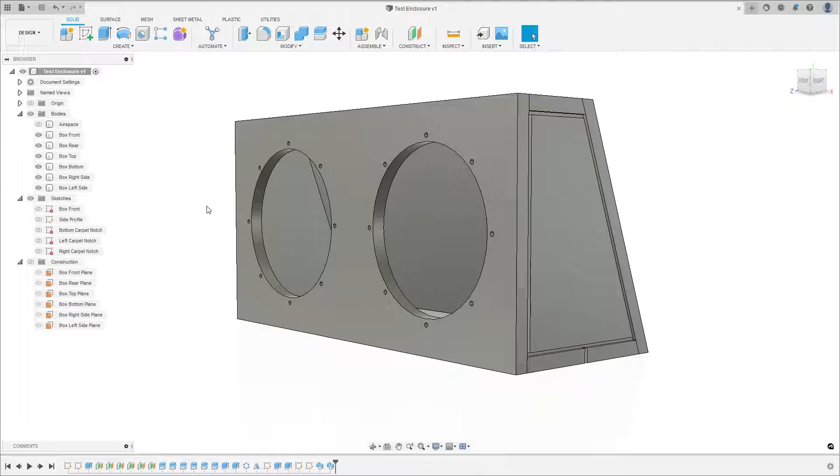We're also going to add some details to the sides and to the bottom of the enclosure that's going to aid in upholstering it. And also the nice part about this design method is the ease in which altering dimensions can be done after the model's created, whether that be for fitment or aesthetics, or to use this model for different vehicles. So we're going to go ahead and create a new file here, new design.

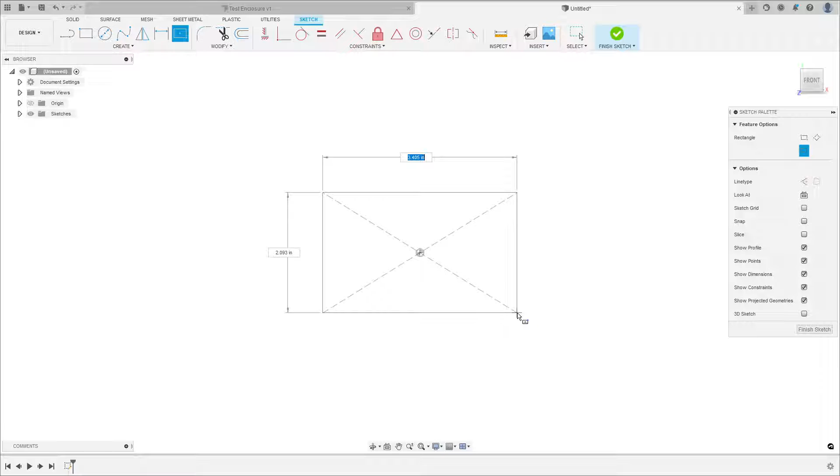We're going to create a sketch on the front plane. I'm going to pick the center rectangle tool. I'm going to snap to the origin. And our dimensions here for this enclosure should be 26 inches wide by 18 inches tall. Zoom out to fit this in. We're going to be putting 2 speakers in this enclosure. We want them to be centered on each respective half.

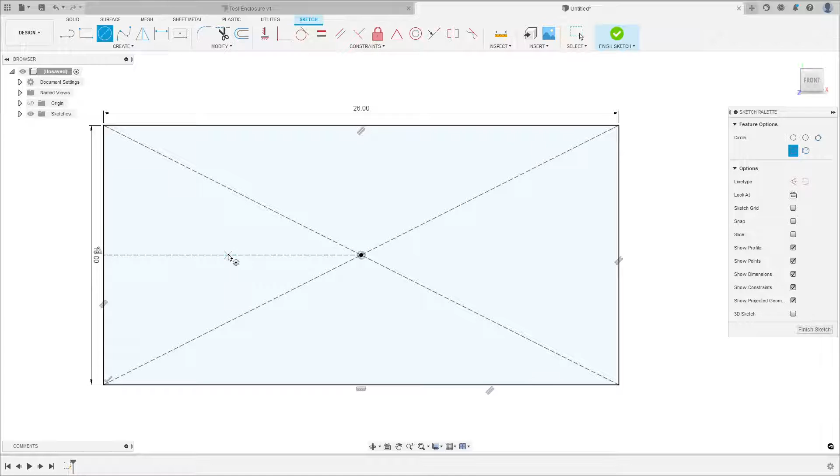We're going to create a construction line from the origin to the midpoint of this left side of the front of the box. Now we're going to select our center diameter circle tool. We're going to turn off construction lines. We're going to come over here to this construction line. We're going to snap to the midpoint. We're going to draw out our circle. The hole for the speaker needs to be 9.0625 inches, and then we'll press enter.

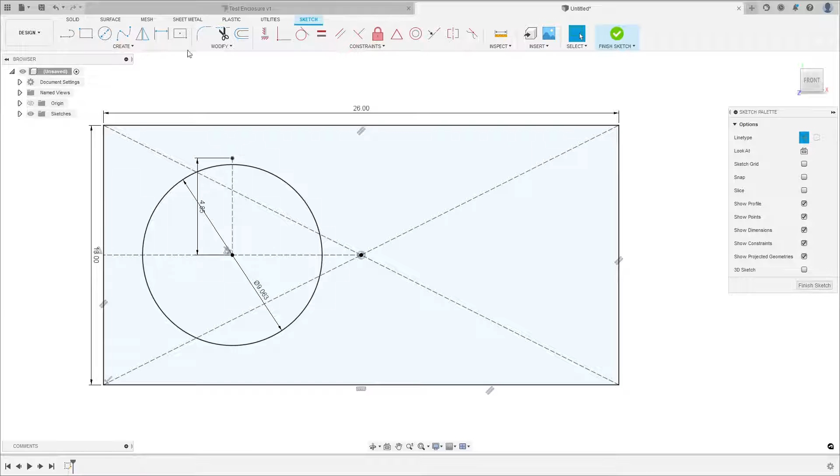And then we're going to go ahead and create a construction line. We're going to snap to the middle of the hole for the speaker, and we're going to come straight up for the mounting hole diameter, which is 9.7 inches divided by 2 because we're dealing with the radius. Now we're going to put in a hole for a T-nut that we're going to use to screw the speakers in. So we're going to select center diameter circle, snap to the end point of this radius line that we just drew. Those holes need to be 1/4 inch in diameter. We're going to type in 0.250, press enter.

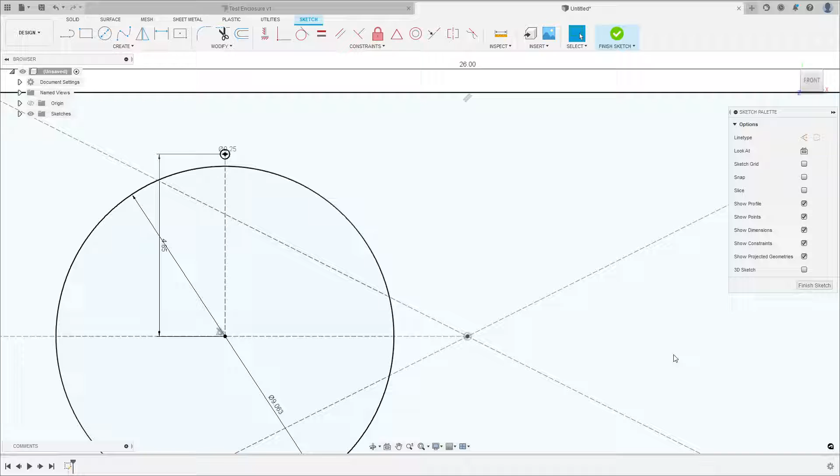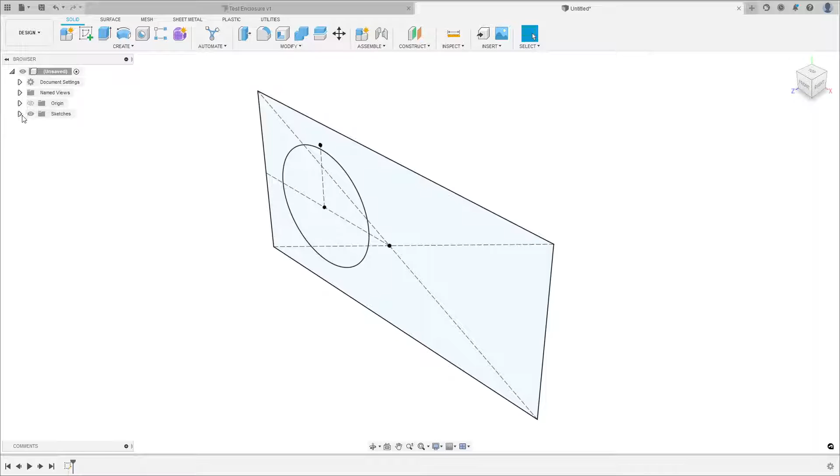So that is the front of the box, sans the hole for the other speaker and the screw holes that go all the way around each speaker. We're going to show you how to do those pretty quickly in a future step. So we're going to hit finish sketch. Zoom out here, drop down my sketch list. I'm going to name this one box front.

I'm going to create a new sketch. I'm going to use the right side plane. Let's rotate around here, select that plane. Now I'm going to hit P for project. I'm going to project this side of the front. Projection link is on. That way if we make any changes to this front, this projected line will change with it. We're going to hit OK, and I'm going to move the camera back to the right side here.

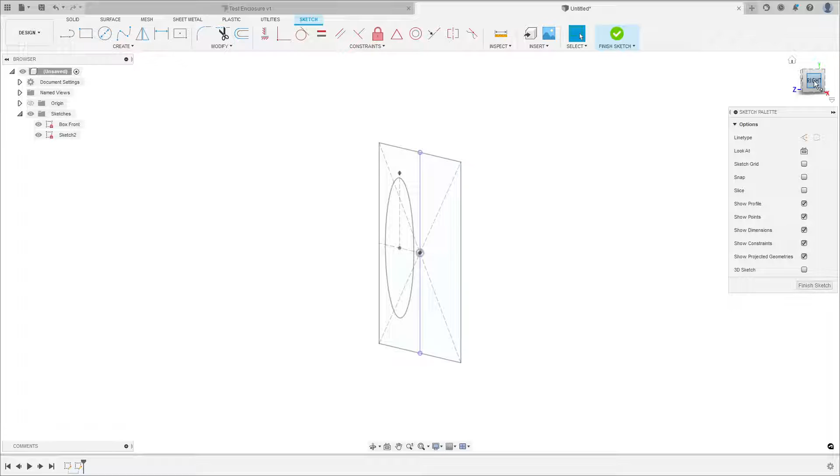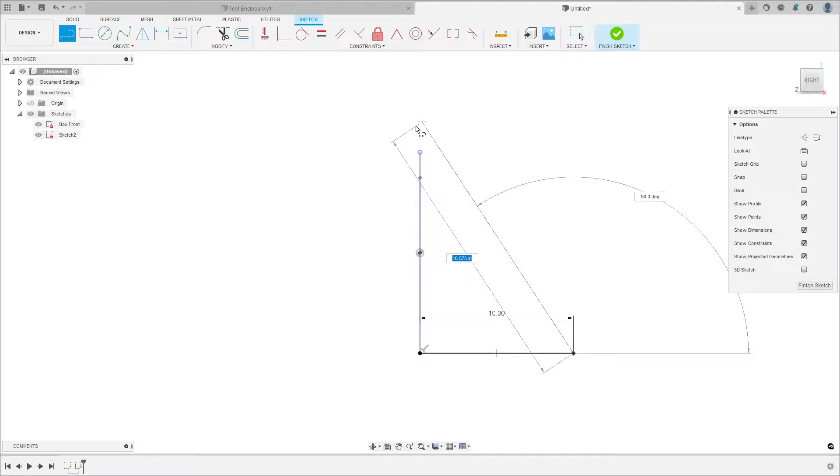Now the bottom of the box needs to be 10 inches deep. Type in 10, press enter, and the back of the box has to be at a 20-degree angle. So we're just going to sketch a line up here past the top of the box over here. And we're going to tab over to the angle, and we're going to type in 110 degrees. That'll give us our 20 off of 90. Hit enter.

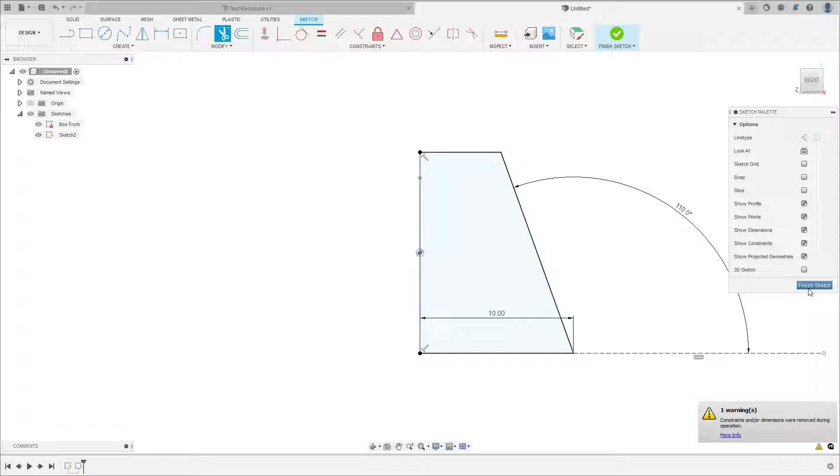Select the line tool again. We're going to snap to this top point and just drag this straight over till it intersects with the back. Now we're going to use our trim tool, cut off this little extra edge. We're going to finish the sketch, and we're going to rename it side profile. Press enter.

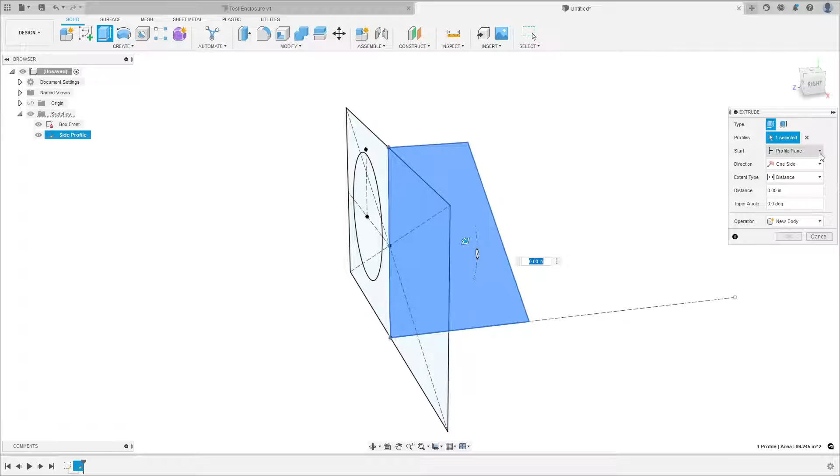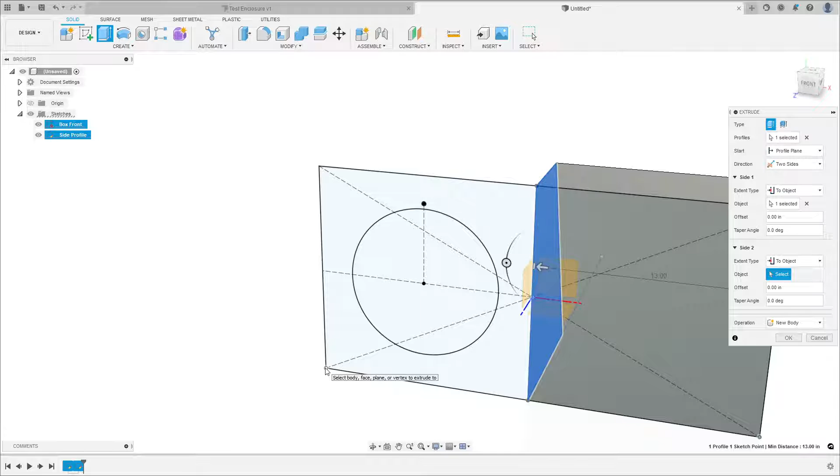And next what we're going to do is create an extrusion based off of this side profile sketch that we just created. Direction, we're going to pick 2 sides. Extent type, we're going to go to object. We're going to click this point right here where the side is. And for side 2, same thing, to object. And we're going to come over here and click this point where the other side ends. We're going to hit OK.

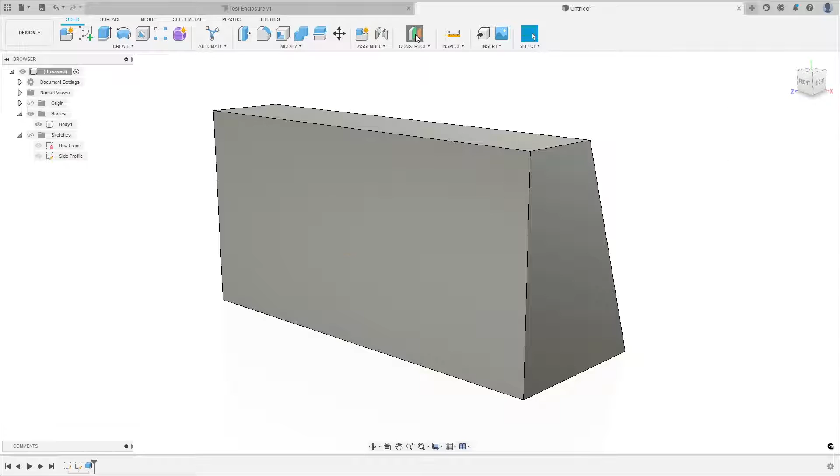So now we have the overall shape and size of the box. This is all one solid mass. It's called body one right now. All right, for now we don't need these sketches. What we're gonna do is we're gonna divide this solid up into essentially boards, like something that we would cut on a CNC router. So what we're gonna do is we're gonna construct offset plane off of each face.

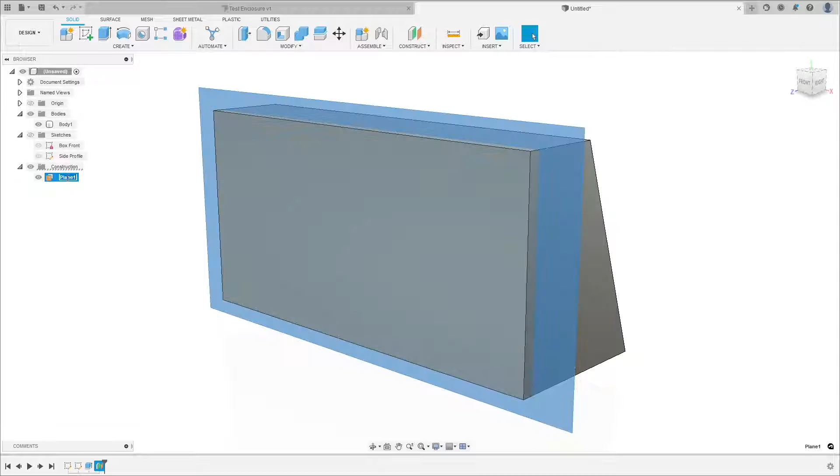So select our offset plane tool. I'm going to click the front face of the box. Now the material thickness that we're going to use is 0.75 inches. I'm going to type in minus 0.75, enter. I'm going to drop down my construction plane list here. I'm going to rename these as we go. This is going to be our, we'll call it the box front.

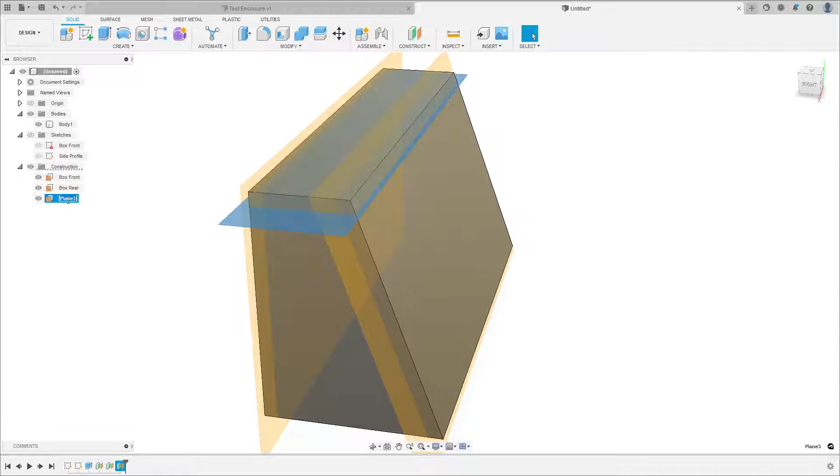Now I'm going to rotate around. We're going to repeat offset plane, minus 0.75. Rename this box rear. Repeat offset plane, minus 0.75. Rename this box top.

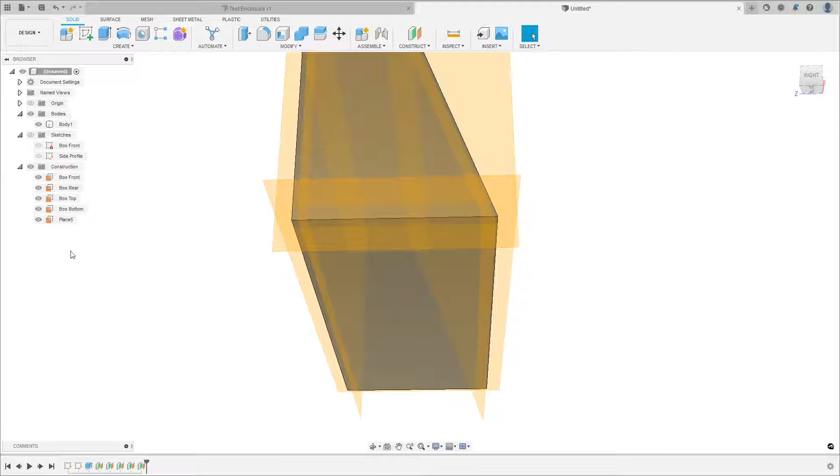Repeat offset plane, minus 0.75. Name this box bottom. Repeat offset plane, minus 0.75. We'll rename that box right.

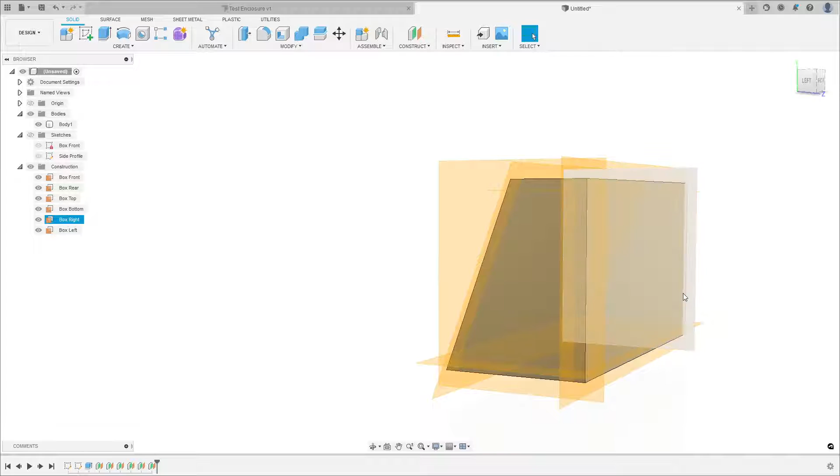And one last time, repeat offset plane, minus 0.75, enter. We'll call this plane box left. All right, so we basically have our solid with a plane that's 0.75 inches away from each face. I can hide these construction planes now, and we're going to start splitting the solid up into boards.

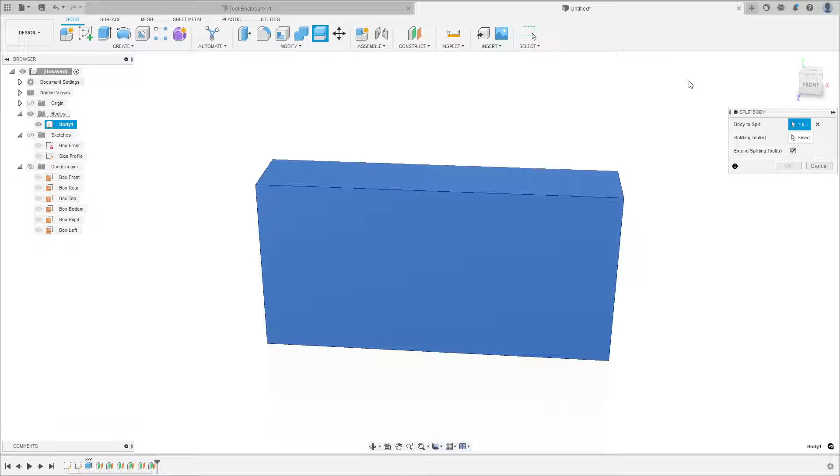So I'm going to go over here to click the modify drop down. I'm going to click split body. Bodies to split is our model. Splitting tools, I'm going to select the box front plane. I'm going to hit OK. Now we've split this into two different bodies. One of them is the front, the rest is everything else.

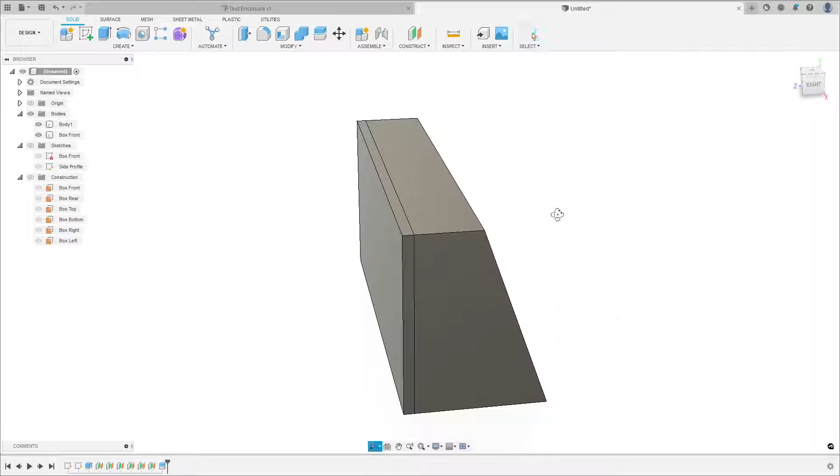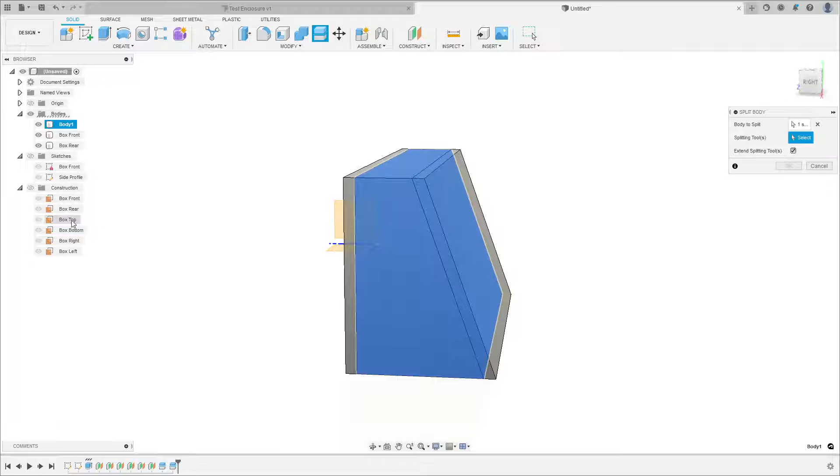So I'm going to rename this body to box front. We're going to do the same thing for each side now. Repeat split body. Bodies to split is the main body. Splitting tool is this plane. Rename this box rear. Repeat split body. We're going to use the box top plane, hit OK. Box top.

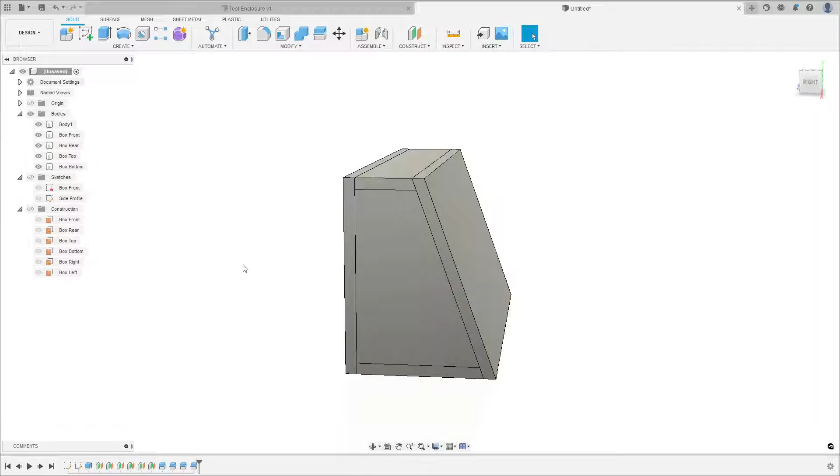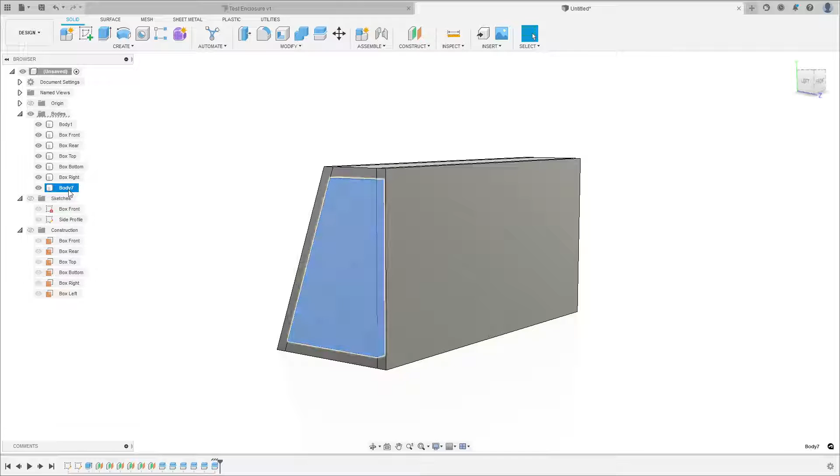Splitting tools is the box bottom, hit OK. Splitting tools is box right. Box right. And for the last side, we'll use the box left plane. We'll rename this body to box left. So now we have 6 sides of the box, and we also have what's left over inside. So this, I'm going to call this airspace, because that's essentially what it is.

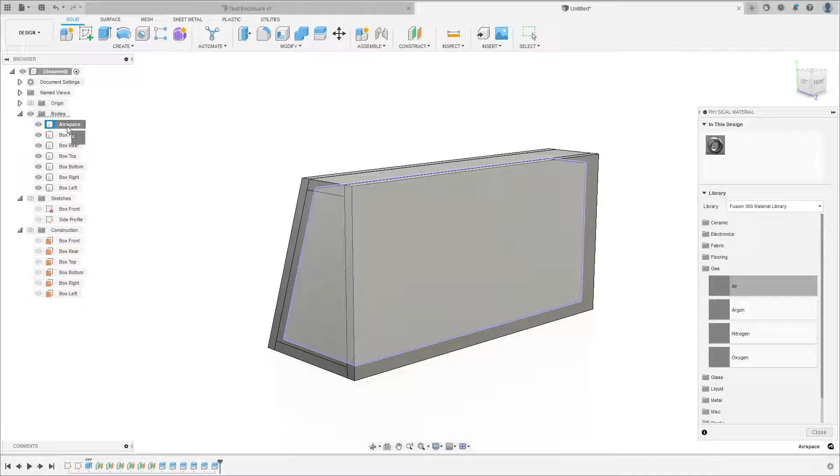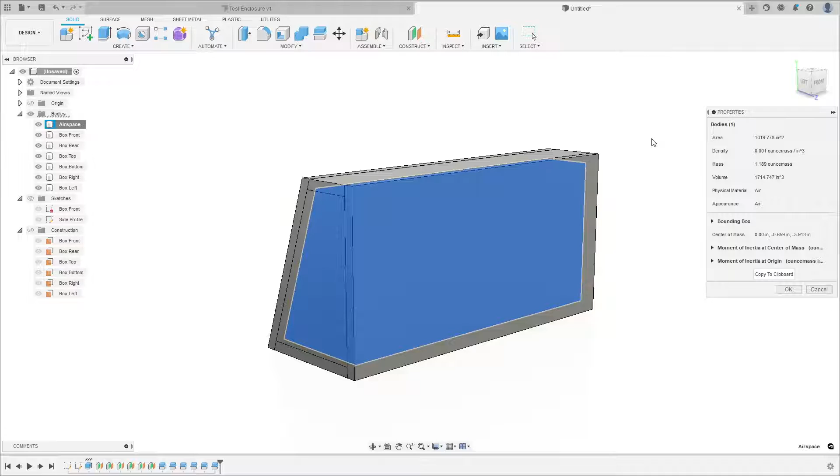I'm also going to right click this and select physical material, and in gas I'm going to select air, drag it over right onto that body. Now a nice side note about this, if we wanted to see the internal volume of this box, we can just right click airspace, go to properties, and here's our volume right here, 1714.747 cubic inches. We just plug that into a calculator, find our cubic footage of the inside of this box.

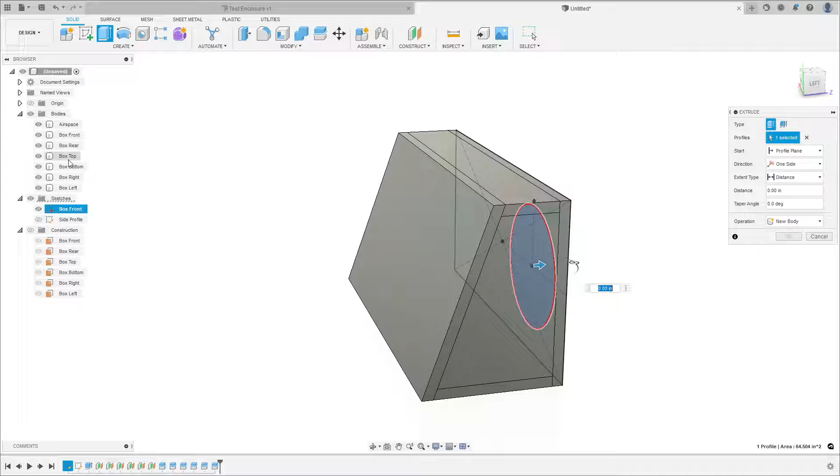All right, so next thing, we're going to turn our sketches back on. We don't need this side profile sketch, so we're just going to use the front profile. We're going to create an extrude for the speaker hole. Rotate it around. I'm going to turn off the box rear body so I can see the back of the front of it. And extent type, we're going to change to object. We're going to select, let me turn off airspace, select the back face of the front of the box, hit OK.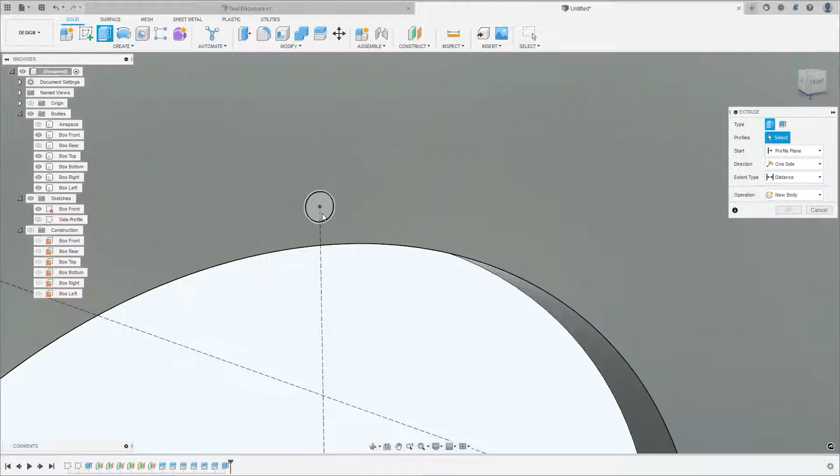Now we need to put this hole for the T-nut. Same thing, extrude, extent type to object, select the back face, hit OK. Now, what we can do is we can turn off our sketch for now. We can create a pattern of this hole right here. So let's hit the pattern tool, or we can subsequently go create pattern, circular pattern. So I'm going to hit the circular pattern button here.

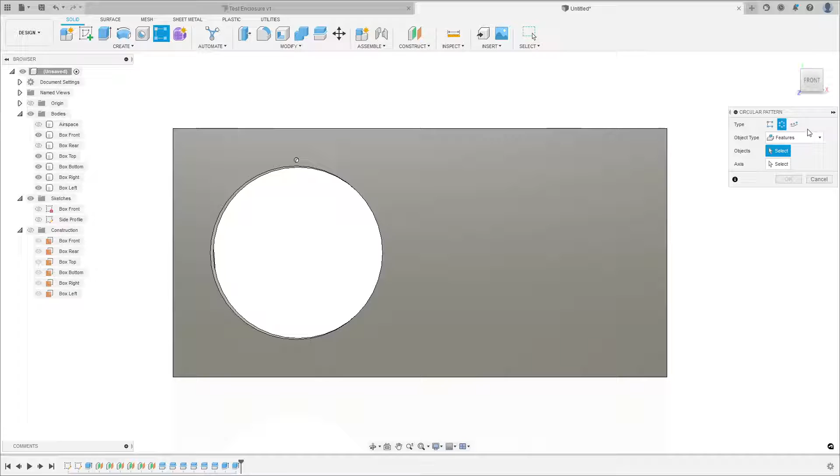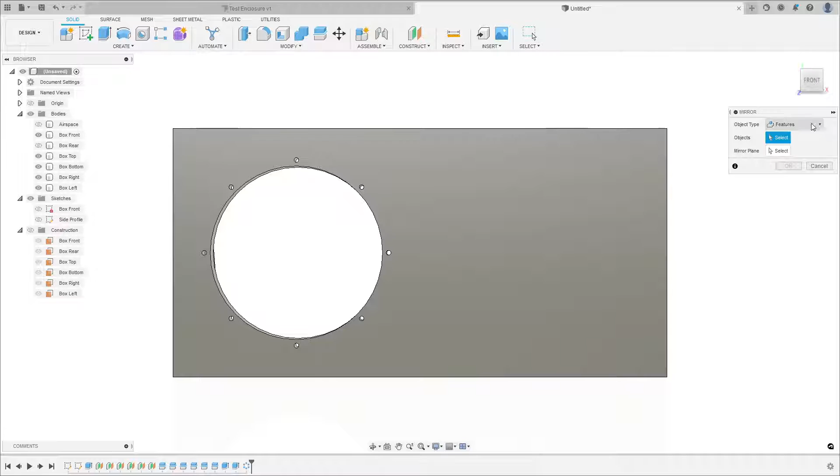Object type is features. Objects will be this extrude that we just made. Axis, we're going to select the diameter of the circle. And quantity, we need 8 holes. We'll hit OK. Now we're going to hit create mirror. Object type should be features. Object should be our circular pattern, our initial screw hole, and the hole for the speaker. And we're going to select a mirror plane, which is this one right here. Hit OK. There's our 2 speaker holes with the screw holes as well.

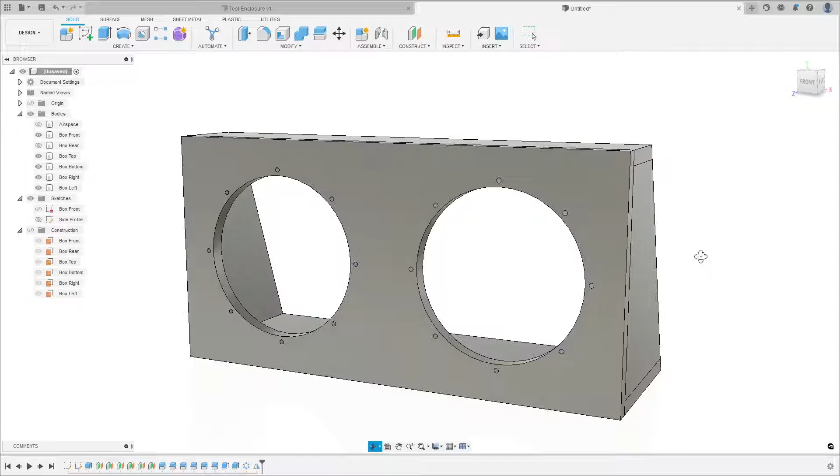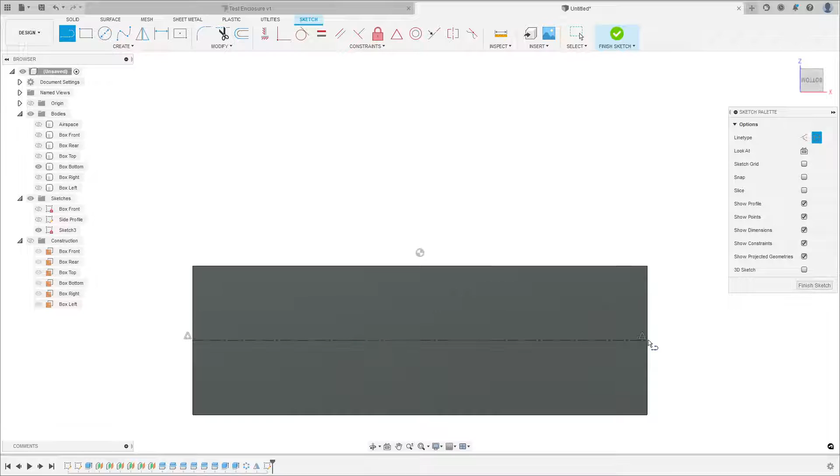All right, let's turn off all of the bodies except for the bottom. We're going to rotate around to the bottom of the model. I'm going to create a new sketch on this face. I'm going to draw a center line from one side of the box to the other. I'm going to hit O for offset. Click this line. We want to put a little 3/16 notch in here to tuck the carpet in when we're upholstering this box. So we're going to type in 3/16 divided by 2.

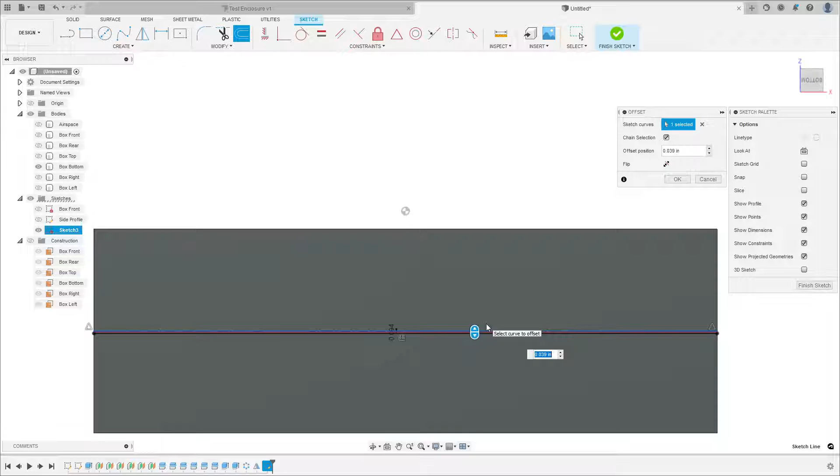Then we're going to do the same thing again. O for offset. This time it goes in the other direction, so it's minus 3/16 divided by 2. Now we need to carry this over to the sides of this particular board. So we're going to hit our 2-point rectangle tool, and we're going to snap to one of these endpoints here, and we're going to type in 3/16 for the width, hit enter, and we're going to do the same thing on the other side. 2-point rectangle, snap, 3/16, enter. All right, let's finish that sketch.

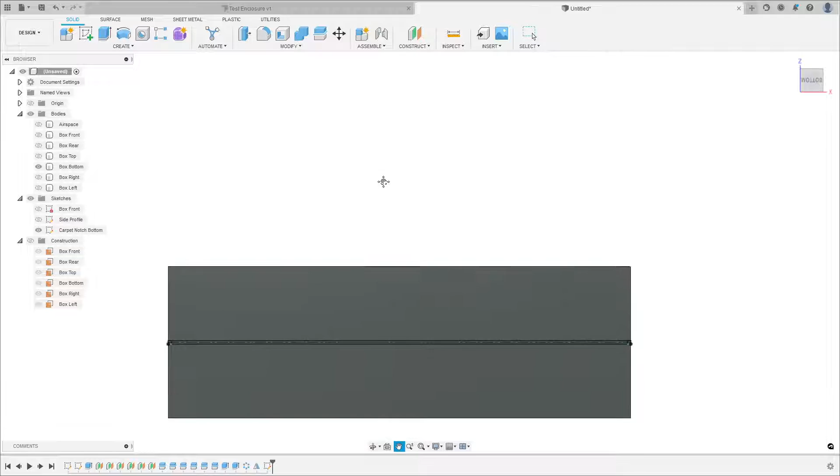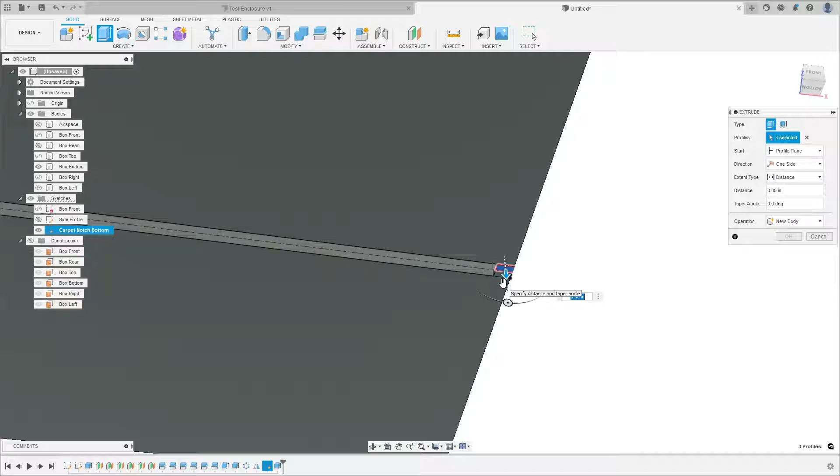We're going to call this carpet notch bottom. Now what we're going to do here is we're going to extrude cut this section here. We want to go minus 3/16 inch deep. We'll hit enter, and then this little guy and that little guy are extrude cuts to the top face of this board. We'll hit OK. We turn off this sketch now. So now we have a notch 3/16 deep by 3/16 wide on the outside of this box.

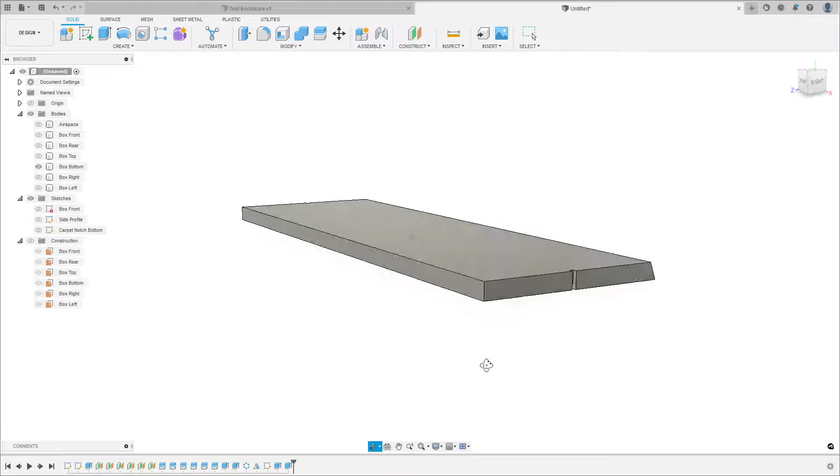All right, now we're going to do the same thing around the sides of the box. So I'm going to turn both of those bodies back on. I'm going to create a sketch on this face, 2-point rectangle. This is 3/16 by 3/16, enter. And the same over here. We need to finish this sketch first. We're going to call that carpet notch left.

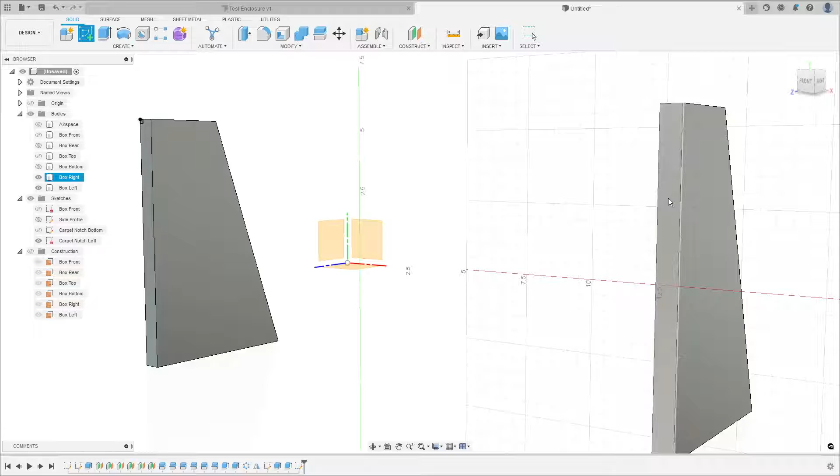Create a new sketch on the right face, 2-point rectangle, 3/16 by 3/16. I'm going in the wrong direction here, I believe. Let me zoom in here. All right, 3/16 by 3/16, enter. Finish sketch. We'll call this carpet notch right.

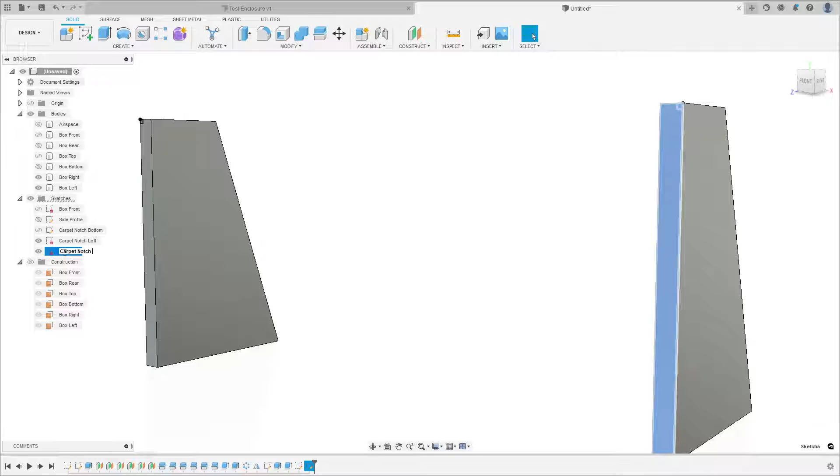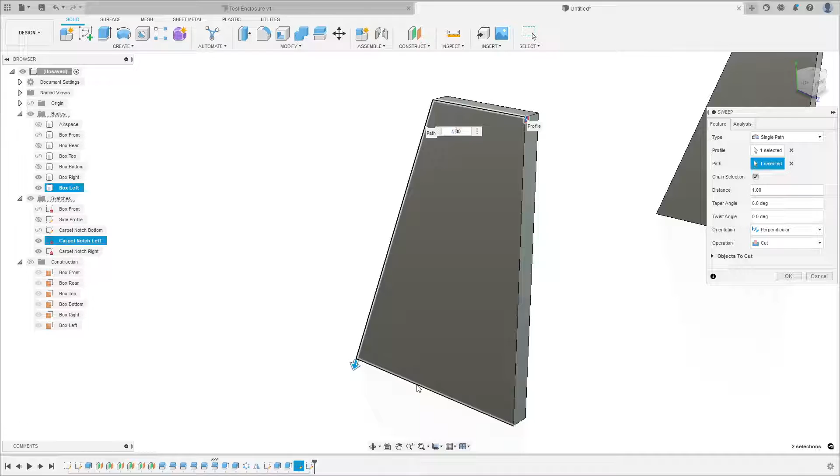All right, now we're going to create a sweep of this little square that we just drew. We're going to click that square. For path, we're going to come around. We're going to select the edges of this board. We're going to hold down Control to select all of them. Operation is cut. We're going to hit OK. So there's that notch. We're going to just repeat the same process for the other side.

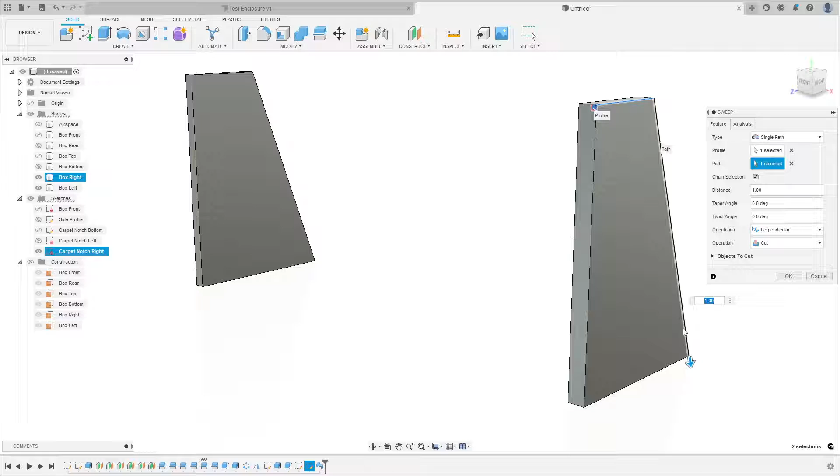Create sweep, profile, we're going to select a little square, and for path we're going to select the 4 edges of this board, holding down Control. We're going to hit OK. Turn off that sketch. Let me turn my bodies back on. And that is our enclosure here.

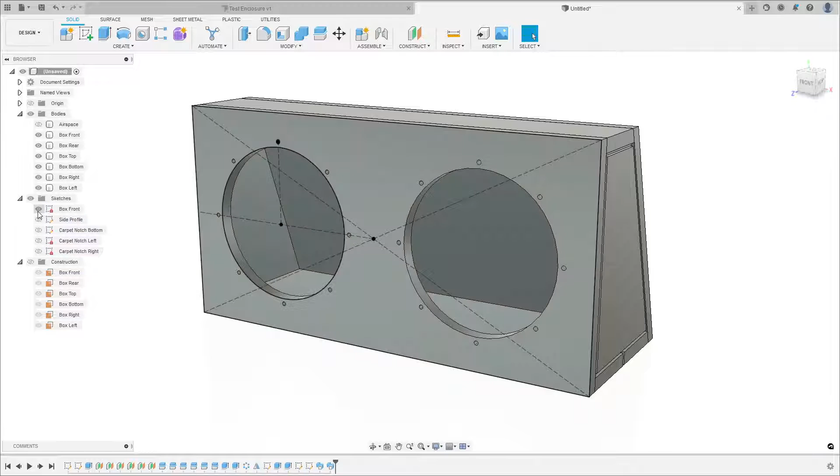So one thing that we can do if we need to change the size of this, whether it be that it doesn't fit in the vehicle like we thought it was, or say a different vehicle comes in, we want to use the same basic design but different dimensions. If we turn on our box front and our side profile sketches here and right click each one and say show dimension, we can basically change any of these values and the model will update automatically. So for instance, say we need this box to be 28 inches wide. We can just double click that dimension, type in 28, press enter, boom, it's done.

Say it can't be 13 inches, it has to be 12 inches tall. Hit enter, done. If the size of the speaker needs to be 9 inches, done, and it automatically updated the other side. If the bolt hole diameter, we'll say, is 4.75, it automatically updated all of the holes.

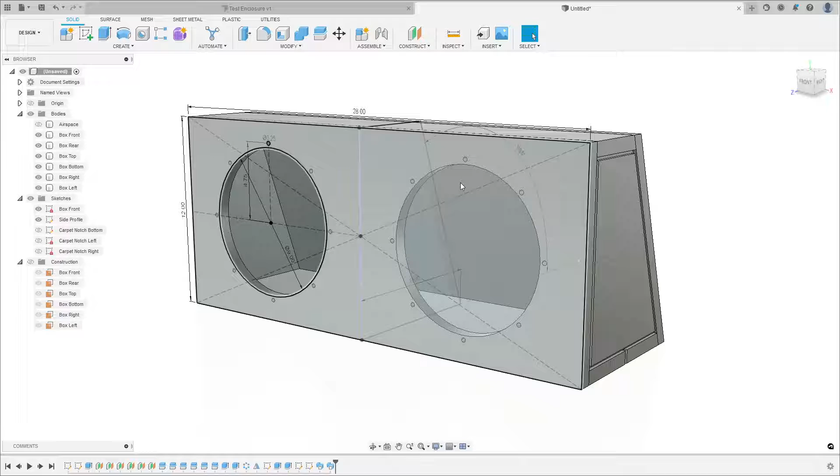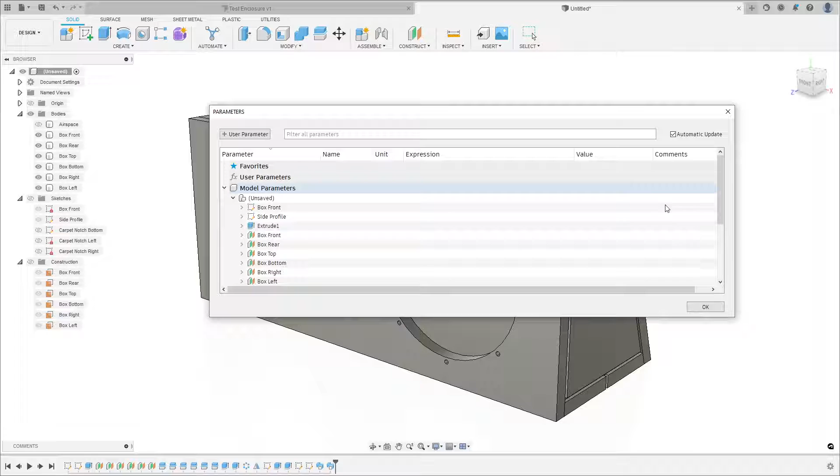Another thing we can do here, turn these sketches off for a second, is say we're not using 0.75 inch thick material. Say we are using something that's 0.7. We could just go into modify, select change parameters. We'll drop down the model, unsaved model parameters. Let me expand this window a little bit. Now from here to here, those are all of our offset planes that we created. If we just drop these down, say our material is 0.7 instead of 0.75, we can just change these values to 0.7.

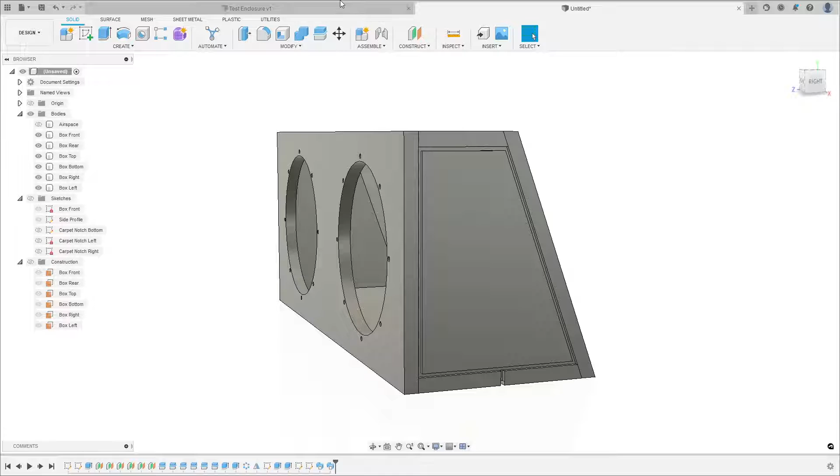Hit OK, and the model updates automatically. If we were to measure from here to here, this will be 0.7 inches now. So that's a quick and easy way to design a basic enclosure that's very adaptable for a lot of scenarios that you might encounter for different vehicles, different woofers, etc.